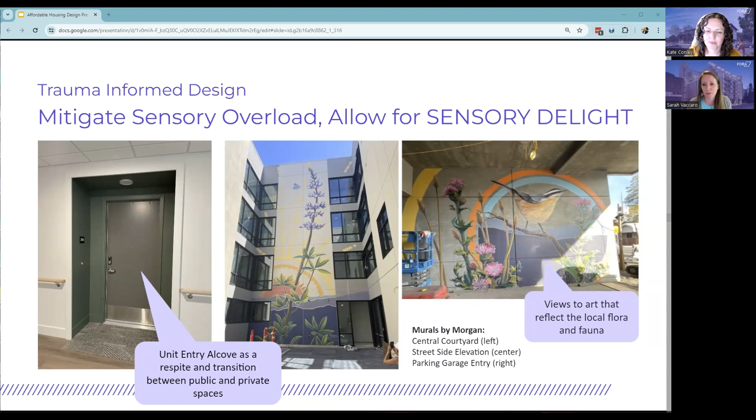Another trauma-informed design principle is to create opportunities for visual connection for safety and calming. We design our entry experiences, allowing residents to visually see ahead so they can decide if they want to interact with the people already in those spaces or choose another path.

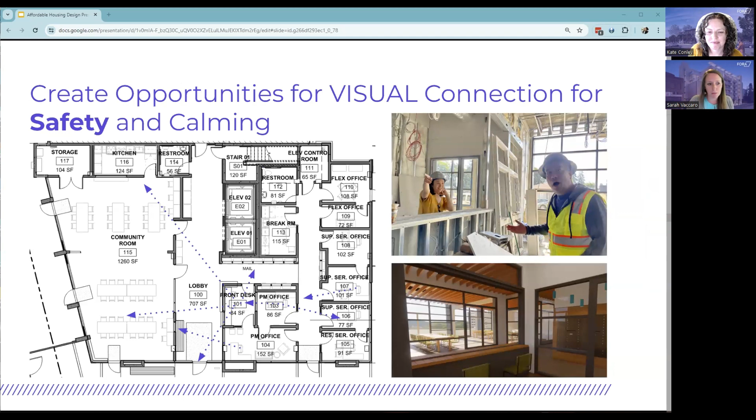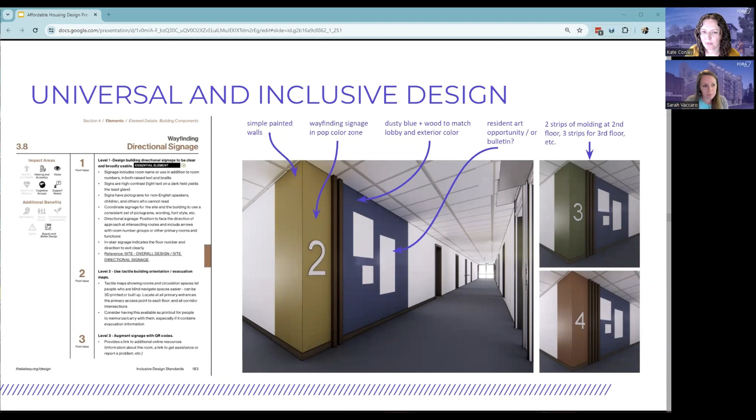When designing for people and residents of all abilities, it's important to provide different sensory experiences. Spaces that are quiet, with lower light levels and less use of pattern and color, can be sensory calming spaces. Spaces with more activity and visual interest can be sensory rich experiences, and allowing residents options to choose a space that best aligns with their needs is a really important design strategy.

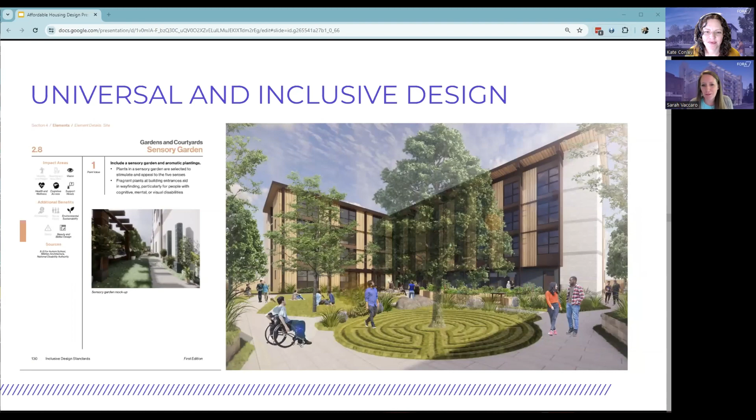In our human experience design approach, we create personas to represent a range of the future resident populations, and then consider the lived experience of those residents' personas in our design process, allowing us to design with understanding and empathy. This process starts with asking who might be the people who would qualify or be eligible to live at this project, for example, our Capitola 38th Avenue project.

These are some of our personas. They're made up, but based on the potential populations that the project will serve and the demographics of that location. We then ask questions to better understand each persona's typical day: consider how that person's day would start, how would they move throughout the site, where do they need to commute to, and what will be their favorite outdoor spaces.

Coupled with our human experience design research, we then look for opportunities to incorporate design features that will better support those experiences. For example, when considering a couple living in a one-bedroom apartment where demographic research shows one person may work from home and need a home office, how can we provide flexibility in the unit layout to accommodate a desk?

At a site organizational level, we map a day in the life of a resident persona moving throughout the site. This exercise can reveal opportunities to improve adjacencies between common area spaces, outdoor spaces, reinforce direct pathway connections, or simple yet important amenities like parking for a wagon near the parking lot so residents have an easy way to bring their groceries from their car to their home.

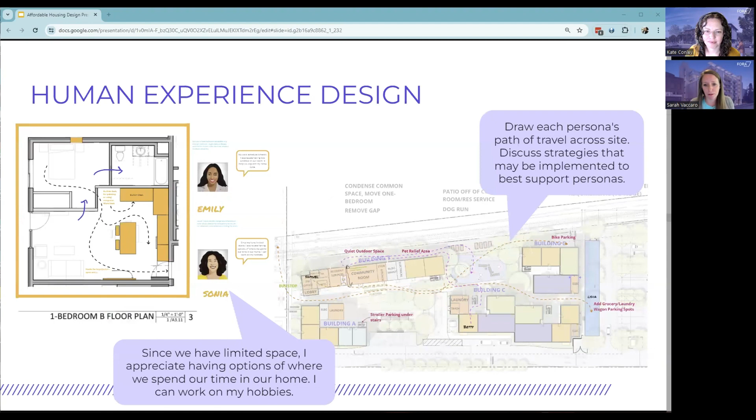The goal of layering human experience design process into our projects is to find more meaningful ways to improve the design at a unit, common area, circulation, and site organization level to best support the future resident populations who will call this place home.

Continuing on the topic of common areas or amenity spaces, our projects have community rooms and outdoor spaces for people to gather and entertain outside of their units. While these are similar types of spaces that you'll find in other market rate multifamily housing developments, in affordable housing, these spaces are also partnered with resident service providers who will provide rich programming in these spaces to support community building, life skills training, after-school programs, and financial stability courses.

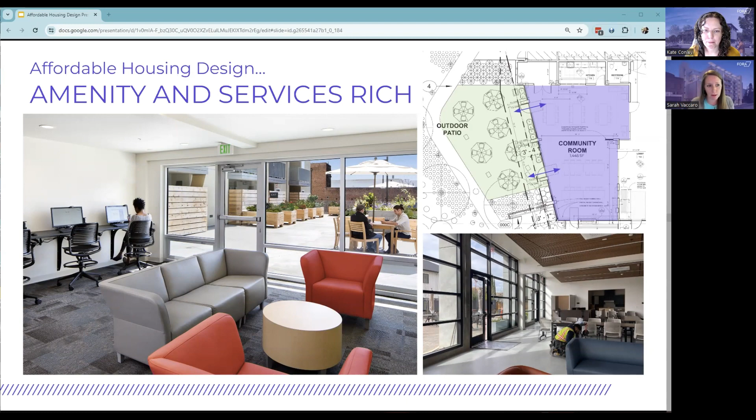In our large family developments, it's important to design safe spaces for younger children to play and other age-appropriate spaces for school-age children to hang out, all while allowing parents to have a clear visual connection to these spaces for supervision. For our Woodside Road project in Redwood City, the building wraps around a multi-level exterior courtyard with the laundry room overlooking the playground and the community room opening up to quieter outdoor spaces.

Based on input from the resident service staff early on in the design process, we located the computer lab and the meeting room adjacent to the staff offices on the ground level so that they could have easy supervision of those spaces and again, make them more open to the residents using them.

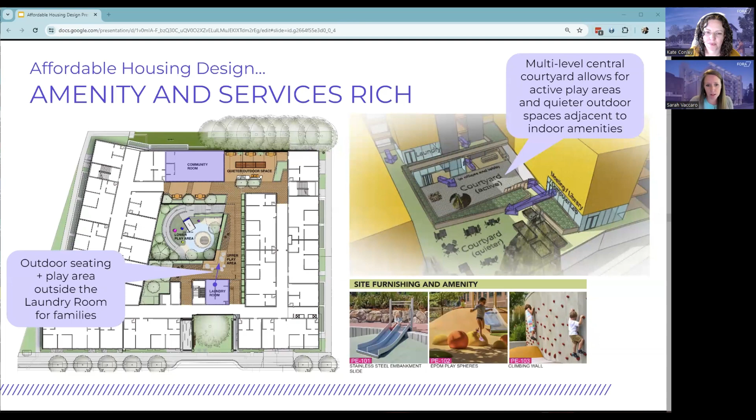For many of our affordable housing projects, there are a number of resident service provider organizations supporting the residents with case management, access to healthcare, employment opportunities, life skills, and financial support training. These service providers are typically on site with offices and meet with residents regularly. In permanent supportive housing for residents transitioning out of homelessness or other special needs populations, resident service providers are critically important to supporting residents through this transition to being housed and ultimately staying stably housed.

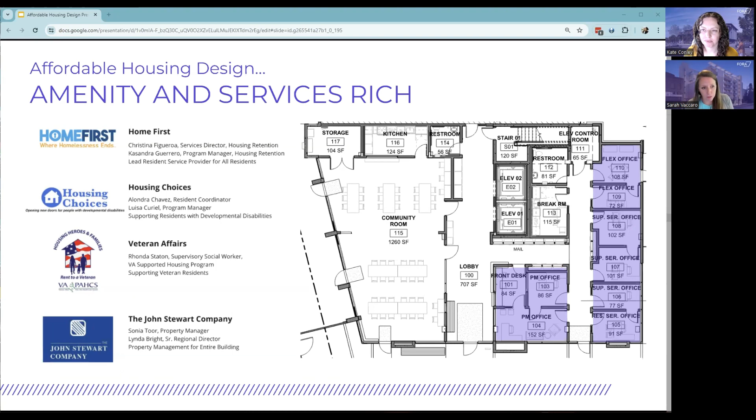On the left here is a list of 4 organizations supporting our residents at IMAC Village in downtown San Jose. The plan on the right shows a suite of property management and resident support service offices adjacent to the lobby and community room of another project in San Jose. And the design of these spaces allows the service providers to provide the critically important support and ensure the safety as they are working with the residents, as well as builds a healthy working environment among the team. It's really important for the service providers and property management to all be working collectively together.

Absolutely. And then moving on, the next tenet of affordable housing design is that at its best, it's designed to reflect the community that it serves and celebrate the unique place where it's located. Our team really dives deep into history and culture to create buildings that celebrate place. Finding the community context of each new project requires in-depth research into history, demographics, geography, and culture.

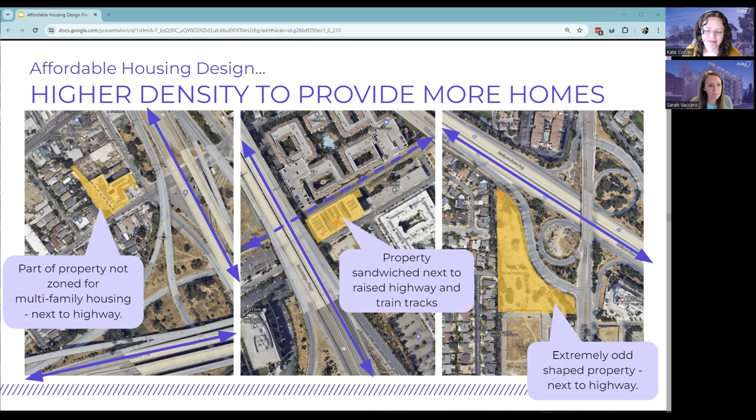Our challenge as designers is to evaluate how many homes we can accommodate on a site within the constraints of the zoning code in a cost-effective manner, so that the project is competitive for financing and creates a quality place for people to call home.

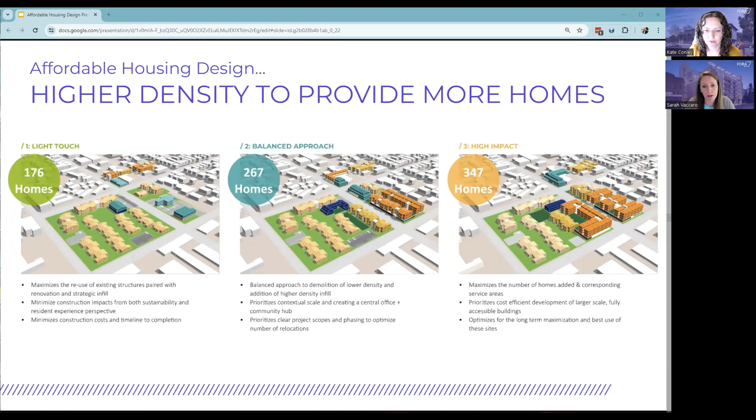All of this to set the stage for one of the main questions we are often asked: if it's affordable housing, why does it cost so much to build? There are a number of different forces at play that impact the upfront construction cost of affordable housing.

First, affordable housing is financed through government subsidies at the federal, state, and local levels, all of which come with a unique set of requirements. They require a minimum size of the unit and a minimum or required mix of unit types—1 bedrooms, 2 bedrooms, 3 bedrooms, etc.

They require that all common areas and a certain percentage of the units be fully accessible to people with different abilities. And they require a minimum amount of support spaces to be included in the development, depending on what type of housing it is. They require a higher threshold for the quality of construction than other project types.

And there are often labor requirements for prevailing wage, diversifying the workforce, et cetera, that impact the construction costs. And finally, they require the housing to maintain affordable rental rates for residents for a minimum of 55 years.

These are all really good requirements to create quality, safe, equitable housing and employment opportunities, and they come at a higher cost. In addition to meeting all of these requirements, the funding through these sources is extremely competitive to be awarded.

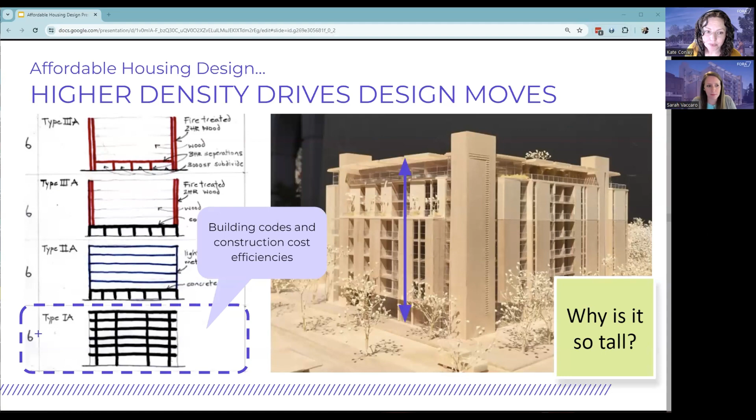And so underground parking structures are not typically financially feasible in an affordable housing setting. And that's why the ground floor often looks like a concrete bunker, to accommodate the number of parking spaces required and keep the residential units safely separated above.

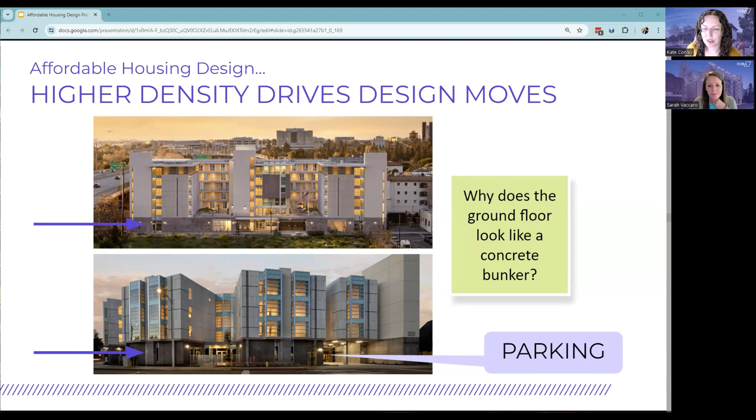So our challenge as designers is to accommodate these requirements while still creating a welcoming and active street frontage that supports a pleasant human scale experience on the sidewalk.

The next question, why is it so boxy? Every site we get for affordable housing development is precious. So we maximize the number of units we can get on site and build them as efficiently as possible. And that means stacking the same type of unit on top of each other all the way up the building. As you can imagine, stacking up a bunch of the same size boxes results in a pretty boxy looking building overall. This is a perfect example of the cost-based trade-offs we make during design.

Sure, we could put more of our budget into articulating the facade and roof lines to create unique building forms that look less boxy. But the trade-offs are typically fewer or smaller units to make that happen, which isn't great for the residents who actually get to live in those units, and less budget to go toward other more impactful design elements like high performance wall assemblies or visually interesting cladding materials.

It could honestly even compromise the amount of budget and space available for interior on-site amenity spaces to serve resident populations who live inside the building.

Historically, the solution to the boxy building problem, as we'll call it, was applied ornamentation, like trims, cornices, to make the building more visually interesting.

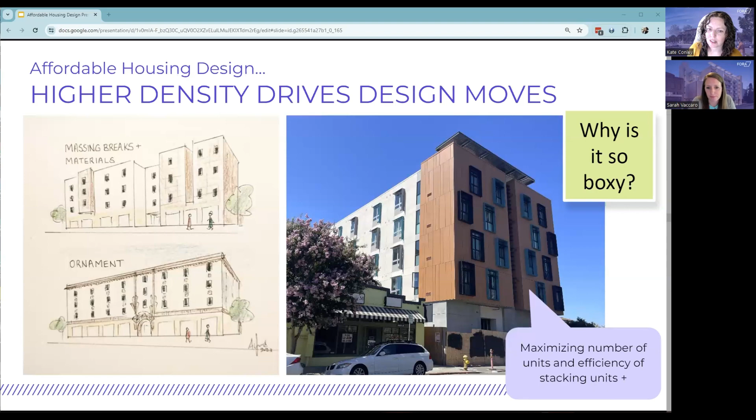Today, the trend is more to introduce breaks in the building mass to create visual interest. Many objective standards, which we'll touch on in just a bit, also require these pushes and pulls to break up the facade, which further reinforces that blocky modern apartment building aesthetic.

Next question, why are there so many windows? This question is like the little sister of why is it so boxy? When the average person thinks of an apartment building, they think of this relentless grid of windows that lends the building a certain bulk.

Each bedroom is required to have a window to the outside, and living rooms, while they don't technically require one, definitely benefit from a window as well. And it also lends light to the kitchen behind it in our typical unit designs.

And the structure and ventilation between the windows generally wants to line up vertically to work efficiently, and so you have all the required clearances. We don't want your bathroom exhaust smells floating back in through your open window, right?

So you get locked into that kind of typical grid pattern. There's sometimes a bit of staggering you can do, like we did on the building on the previous slide, but that adds complexity, which adds, you guessed it, cost. So we tend to do this judiciously and really only employ it on highly visible street facades.

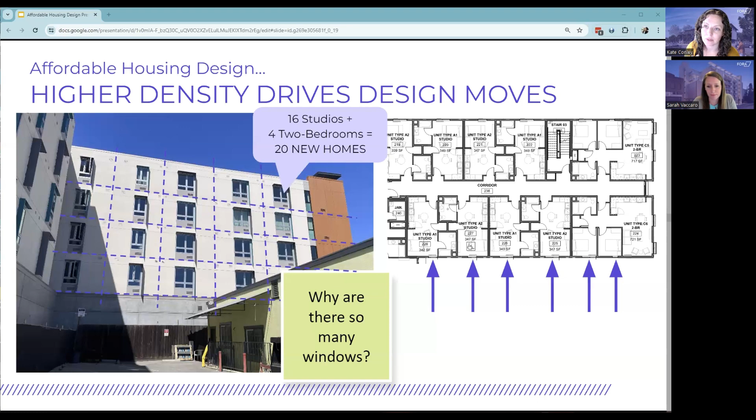Next question, do the residents have any privacy? Sometimes when we're working on one of these awkwardly shaped sites that Sarah mentioned, we'll end up with some tight courtyards and we need to get creative to maintain our residents' privacy.

Many cities also require us to do view studies from the apartments in our proposed development to the homes surrounding them as well. And inside the building, we are continuously refining the way our walls are built to provide good acoustic separation between units through a combination of code requirements, performance testing, and making sure we have acousticians on the design team advising us.

Our favorite, why are all new buildings covered in rectangles? You're talking about what we refer to in our industry as a rain screen. These are panels that, yes, are usually rectangular, that get attached to the building with typically metal pieces that create an air gap behind it.

This system can help us create a building envelope with better thermal performance, which reduces the amount of energy needed to heat and cool the building. It also just provides a visual contrast to stucco.

Stucco or cement plaster is the least expensive yet wonderfully fire resistant way to clad a multifamily apartment building. But most cities in the Bay Area require more than one exterior material to be used on the building for visual interest, which in all honesty were probably created mostly in response to the building industry's deep love affair with stucco. So rain screens are a relatively cost-effective and high-performance way to introduce that variety into the facade.

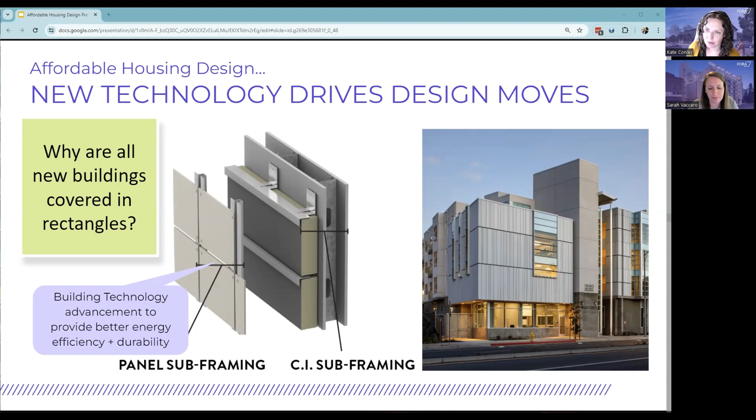Why do they all look the same? Another one of our favorite questions. We feel you on this one. As much as we strive for each and every one of our buildings to be a unique reflection of place, you can see we're playing by a lot of rules and very practical design constraints already.

And another set of rules to layer on top of that are objective standards or form-based codes, which many Bay Area cities have adopted in response to ministerial or streamlining requirements, especially for affordable housing developments.

We're actually big fans of objective standards because they're a benefit in terms of expediting approvals, because they create a clear set of rules for us to play by when we're working with our friends at the planning department to get our projects entitled quickly.

But we do agree that if these standards or the resulting designs don't respond to the context of the place and the people in that community, then they can lead to a homogeneous looking end result.

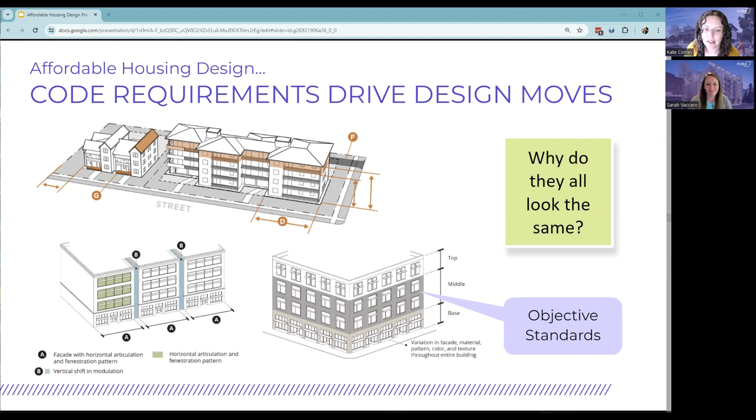This is a big reason we take the time to do community engagement and understand who and where we are designing for. Market rate developments are a for-sale product and can fall victim to what we call the assembly-lineization of design that meets the letter of standards like these and simply moves on.

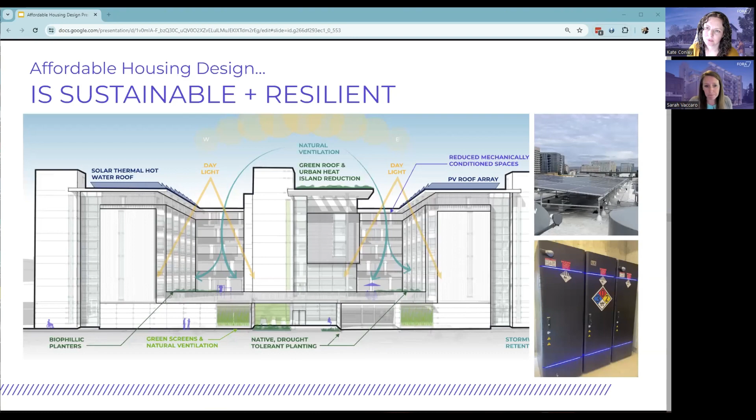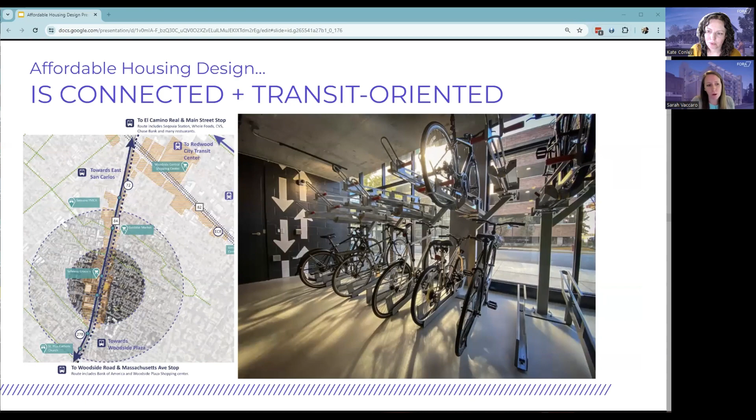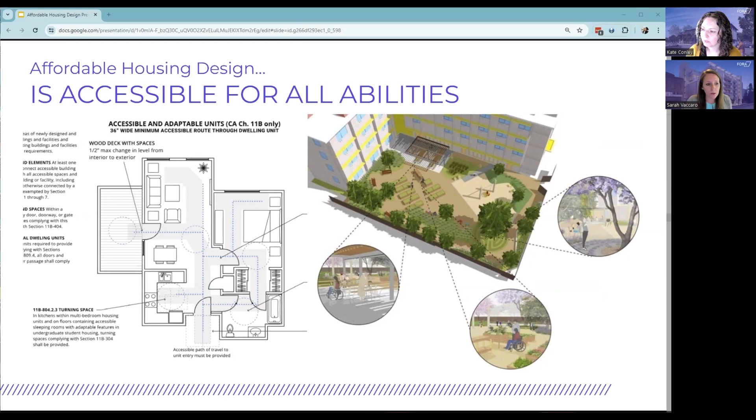So I'll pass back to you, Kate, to summarize. So what makes affordable housing design so different from the design of other types of housing? It centers around the people who will live and work there. It reflects the community context and supports community building. It creatively responds to the need for more homes while doing so as cost effectively as possible. And it's durable, sustainable, connected, and accessible for all.